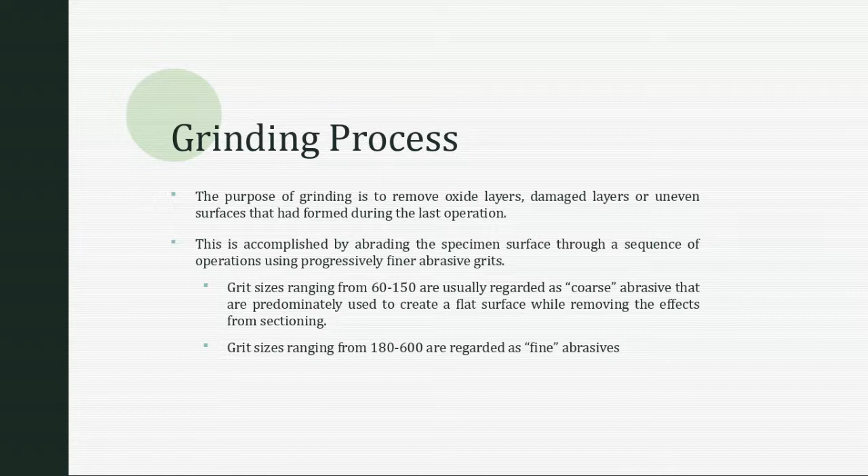There are two different types of grinding categories. The first is coarse abrasive, which are grit sizes ranging between 60 to 150 grit. Then you have the fine abrasives, which are in the range of 180 to 600 grit. I'll get to their micron sizes shortly when I show you guys the chart.

During the grinding process, the best way to start once again depends on how you sectioned your sample. You're going to start with the finest grit size possible that can establish a single plane across the entirety of the mount. So if you started off with a hacksaw or bandsaw, chances are you'll need to start with 120 or 180 grit in order to get your entire sample on one plane, removing the effects of the disturbed metal caused by that sectioning process.

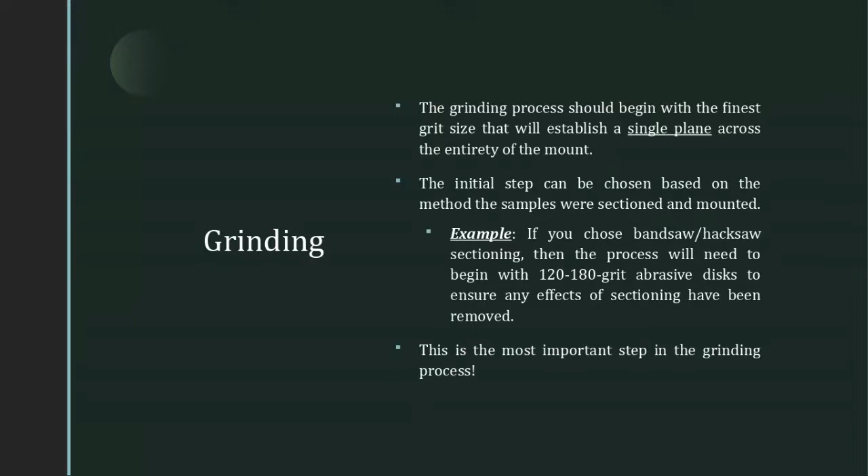This is the most important step when it comes to the preparation process. How you section your sample is by far the most important step, because that determines how you're going to proceed with the grinding process.

All the grinding steps should be performed wet, as long as the water doesn't have any adverse effects on the constituents in the microstructure. Some metals don't like water, so you might have to grind with an ethanol or glycol-based lubricant instead of water, depending on your sample preparation process. For instance, if you wanted to polish magnesium, magnesium doesn't like water, so you would use a glycol or alcohol process instead.

So why would you wet grind instead of dry grind a sample? If you dry grind a sample, you essentially heat up the sample since there's nothing to lubricate or cool it. That's something we're trying to avoid, especially during long durations.

You're using these papers anywhere between 30 seconds to a minute long. If you left a sample on one of these abrasive pads for that amount of time, the sample ends up becoming way too hot to touch, and you can actually burn your fingers.

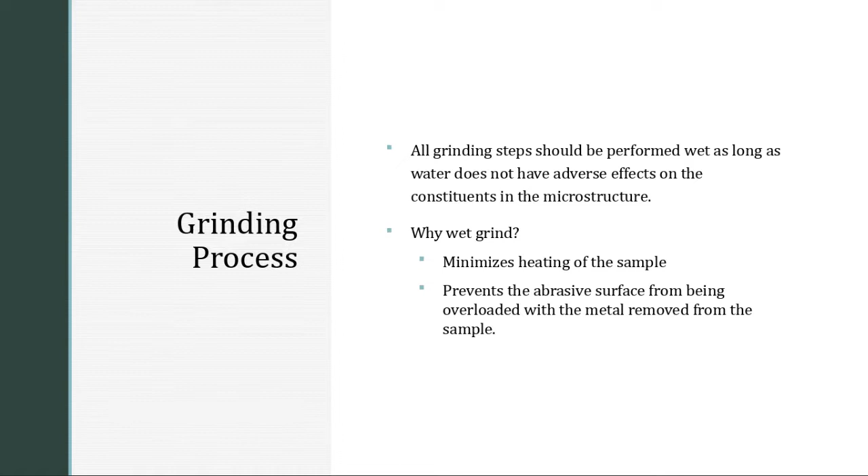Each one of the grinding steps will create its own damage layer. That's why after sectioning the sample, the starting grit depends on how you cut it.

If you were to hacksaw, you have to start off with a 120 or 180 grit. If you used an abrasive cutoff wheel, you could probably start off with a 240 grit. And if you sectioned your sample with a precision diamond blade, which would put the minimal amount of damage, you could probably start that step off at 600 grit for your start point in the grinding process.

As your grit size decreases, you have to think that the depth also decreases. You're not going to have that same depth of damage to your sample a 120 would create versus a 240 or a 320. So in order to remove the damage caused by a 180 grit abrasive paper on your sample, you would then need to move to 240 and ensure that all that damage is removed. You might have to spend a little more time on your sample than the previous step.

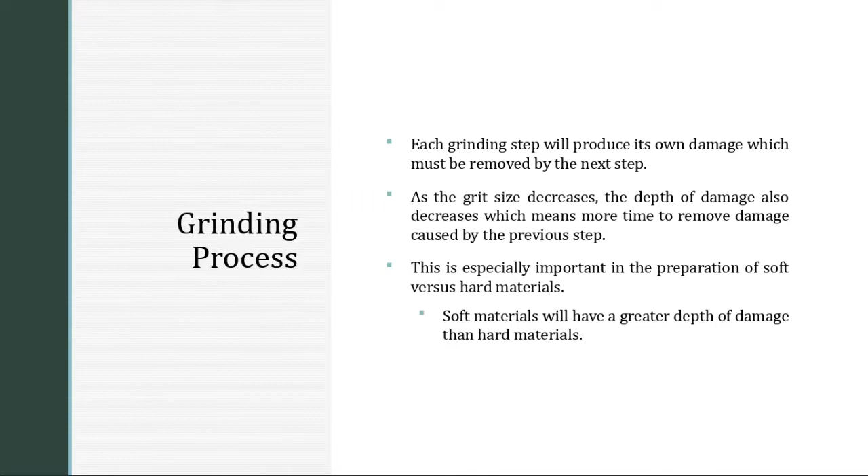Commonly used grinding abrasives - the one that's widely used and more readily available is the silicon carbide discs. You essentially have silicon carbide that's embedded onto these waterproof papers that can either be fastened to the metallographic wheel, or they have an adhesive back that you can apply to the wheel, kind of like a sticker.

Alumina as well, but since silicon carbide is more readily available and cheaper, that's the one that's used more often. You do have

Emery ceramic compounds - it's a combination of alumina and magnetite, which is Fe3O4. That's rarely used nowadays. I just thought I would mention it because that's how a lot of this metallographic preparation process started. But it has very low cutting efficiency, and in today's day and age you kind of want to get stuff done on a more rapid basis.

And then, of course, you have your diamond compounds, which are typically used on napless cloths.

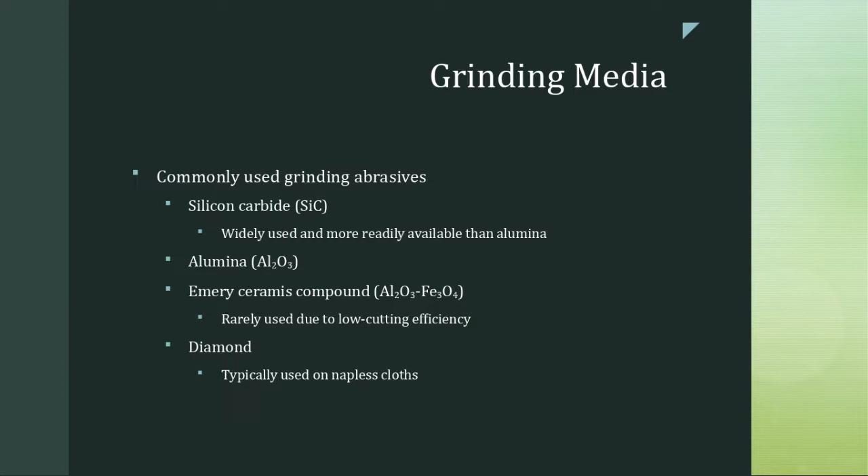Some of the standards - silicon carbide papers have two different standards. You have the standard for the United States, which is the ANSI-CAMI standard, and then you have the FEPA standard for the silicon carbide papers manufactured in Europe. The difference between the two is that the advantage of the papers manufactured here in the States is that it uses a wider particle size distribution.

So the mean size will give you faster cutting rates at lower pressures. And because you have faster cutting rates at lower pressures, you generally generate less heat and damage into that sample. But the disadvantage is because you're using a wider range of particle sizes, the larger particles within that mix can give you deeper scratch depths, and that's one thing we want to prevent.

Now, of course, when you move to the next step, you're supposed to grind through the sample and eliminate any of that damage caused from the previous step. So is it really a disadvantage? Probably not. I think it would be more problematic as you move from the grinding discs, like the silicon carbide discs, into the diamond or final prep process.

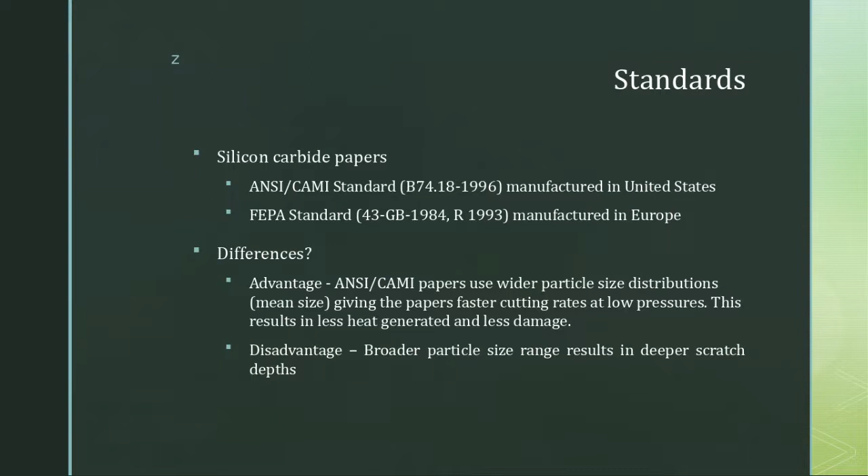So to look at the micron sizes between the FEPA and ANSI, or Europe versus US standards, one of the tips I'll say right now is you need to stick with one or the other. You cannot mix and match.

It might not be problematic in the beginning, because if you look at this area here, they're pretty much on the same grit size. So your P60 grit, or 60 grit paper, is 269 micron versus 268 micron. Not a problem. But we're not really starting with these ones at the top.

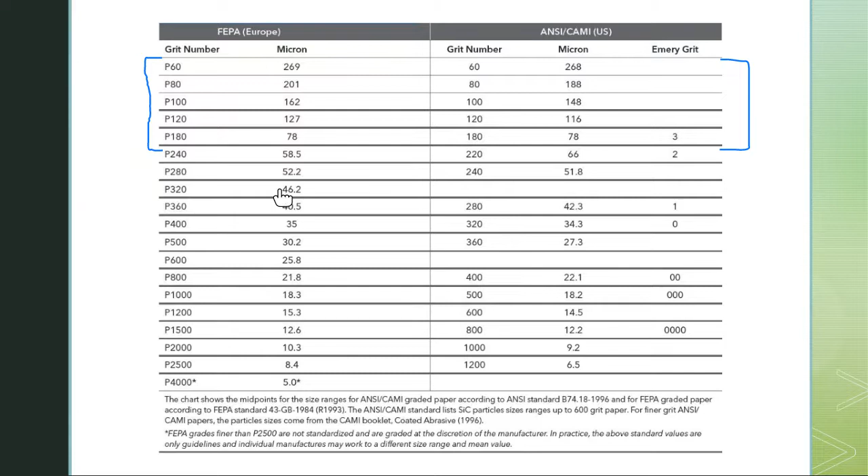We're really starting with 120 to 180. When you look at 180, they're about the same grit size for both. Then you look at 240 - this is 58 to 66, 52 to 51. Typically after 180 you'll hit 240, then 320. Here's a 320 at 46 micron, but the 320 on this side is 34 micron.

Maybe it'll be better if I highlight. So here's 120, here's 120. Then we're looking at 240 as the next step - here's 240 on this step. We'll look at 320 - and here's 320.

I typically skip the 400 step and go to 600 when I prepare my samples, and I'll explain why in a bit. But here's 600 versus 600. After the 600 grit step, I typically jump into my diamond polishing.

But when you look at the four steps I've highlighted, look at the differences in micron size associated with each grit paper. Like I mentioned, 120 grit isn't that big of an issue, 240 to 240 isn't too bad, but 320 to 320 you're looking at about a 12 micron difference.

And then, like I mentioned before, look at the micron difference at the 600 grit - 600: you have 25 to 14.

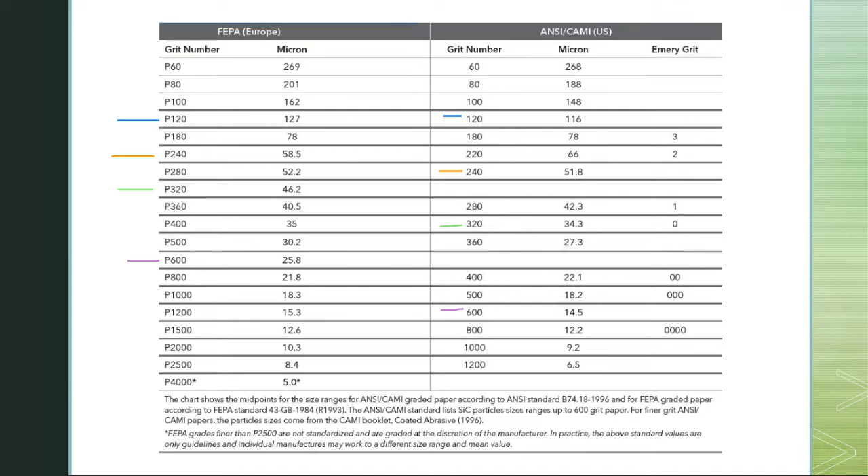So moving to 9 micron diamond paste after this, it would be easier for me to prepare samples from this category, because the last micron size is 14.5, versus jumping to 9 micron from 25 micron. I'll have to grind much longer, which wastes a lot of time and prep, and you also risk rounding out your samples.

So if you were using the Europe-based silicon carbide, you might have to introduce a new step in between 25 and 9, something at P1000 to P1500, in order for you to jump to a 9 micron or 6 micron size - to be on the same page as 600.

So if you were to start mixing and matching, there's a chance that if you jump from a 320 and then use a 600 grit, the jump from 46 micron to 14 micron is so large that you'll end up doing more damage to your sample because you'll have to spend more time on 600.

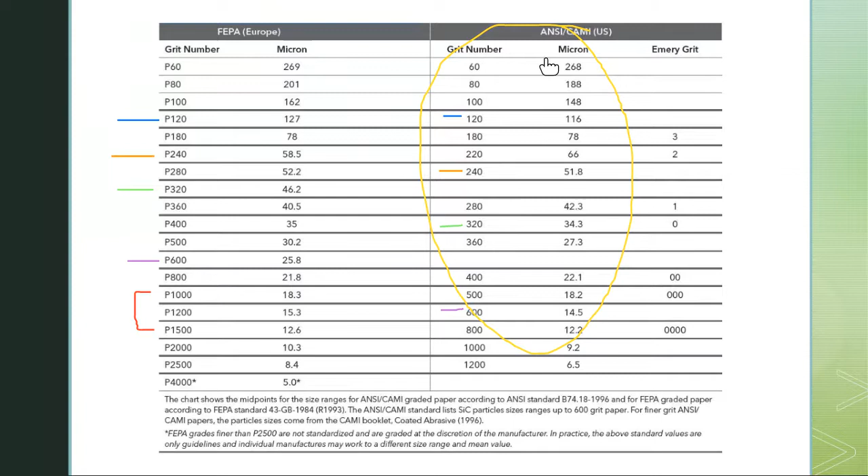So your best bet is to stay with one category when it comes to using grit sizes in your preparation process.

Once again, I have illustrations on what speeds you should use during the polishing and grinding process.

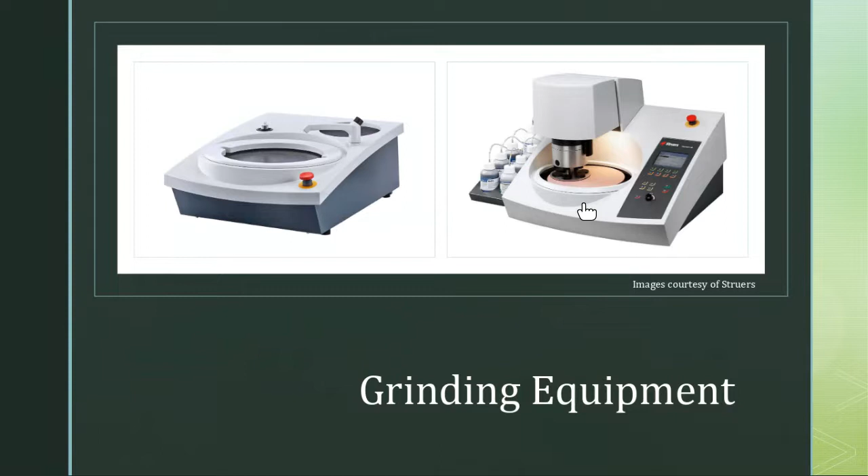So in the polishing process, this is the final step. Depending on where you end your grinding steps, this is where you jump in to provide that deformation-free surface, and it looks like a mirror.

I kind of joke around all the time talking about how we're not, as metallurgists, conceited because we always want to take a look at ourselves in the mirror. But that's one way you can check if you have a scratch-free surface, every time you pull your sample off the table, you're actually looking at yourself. So it always seems like we're conceited, but we're really not. It's a scientific thing.

So once again, just like in the grinding process, you have two different categories in the polishing process: your coarse polish and your fine polish. Your coarse polishing is anywhere between 9 to 3 micron. I typically use 9, 6, and 3 micron. Then for final polish, I typically stop at 1 micron. I don't have to proceed any further than that.

It is necessary for these steps to provide the true microstructure for the interpretation, testing, and analysis, whether it's quantitative or qualitative. If you do not complete the polishing process, the amount of scratches and or deformation still on the surface hide that true microstructure.

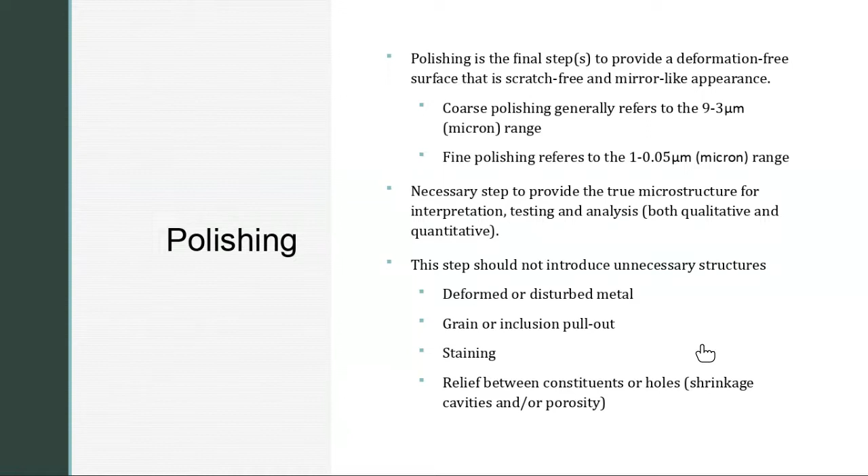Also, since you are in this step, this step is not there to introduce unnecessary structures or other anomalies on your sample. Such structures I'm talking about are deforming or disturbing the metal, grain or inclusion pull out, staining, or creating relief between the constituents, or holes like porosity, shrinkage cavities, and that nature. And I have some images to show you based on those.

So your coarse polishing begins in that 3 to 6 micron range, and you're performing this now on a napless cloth, typically nylon or silk. These cloths depend on how they're woven; they do not have fibers that come off the pad. It's just a woven napless cloth. The reason we use these is to help with edge retention. Edge retention is a must. It also helps with sample flatness.

So the coarse polishing, if you're using 9, 6, or 3 micron, all of that is performed on a napless cloth. Then when you get to the final step, your final polish can also be done on a napless cloth or a low nap cloth, something with short fibers, using 1 micron diamond. Each step must have a compatible lubricant. Once again, you can still overheat your sample or deform the surface if you do not have adequate lubrication on that pad. And you don't want to drown your sample either.

So the purpose of this week's lab is to show the techniques and the amount of usage for each of these consumables that we'll be using.

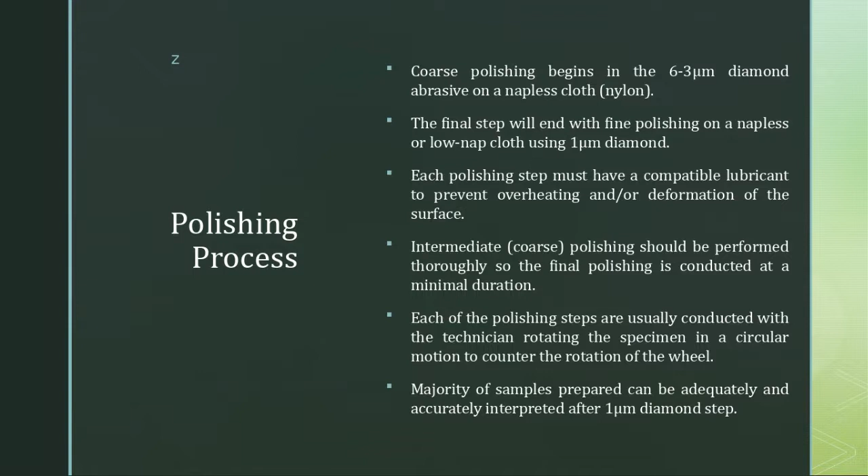Okay, well, this is commercially pure titanium, so it's going to be very soft, and since it's soft, you have a tendency to create mechanical deformation. So that right there would already lead to a microstructural misinterpretation of what you're really seeing.

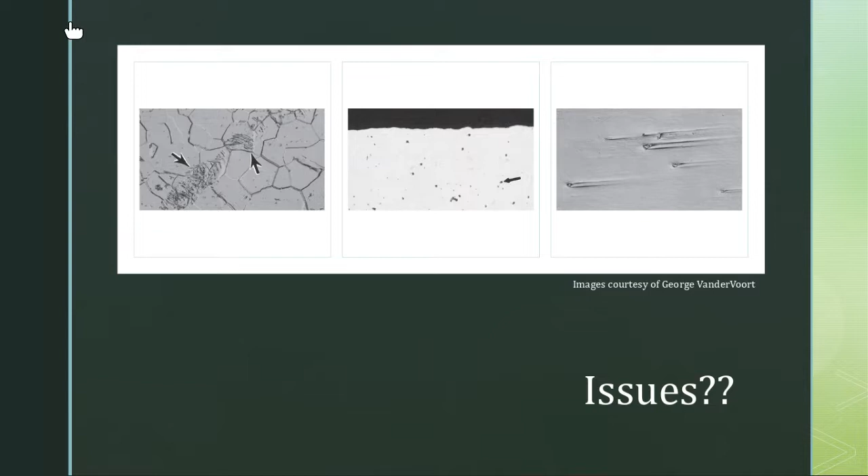So when it comes to polishing cloths, what makes a good polishing cloth? How do you know what to select? Well, for one, you have to select a cloth that's going to hold the abrasive media that you are willing to use. Not all cloths are created equal. Some cloths are meant to hold 9 micron, 6 micron, but they would perform horribly if you're using it for 3 micron, 1 micron, and of course anything smaller than that. You have to have a polishing cloth that has a long life.

And of course, an absence of foreign material. You will not use a polishing cloth that you just polished, say, tool steel with, and then try to go polish an aluminum sample, because the tool steel being a much harder material, you still have abrasive tool steel particles on that pad that will scratch your aluminum, and you will never have a perfectly polished aluminum sample. Vice versa, if you try to polish aluminum and then try to polish a steel component, since aluminum is softer than steel, there's a chance that you could smear the remaining aluminum particles onto your steel surface.

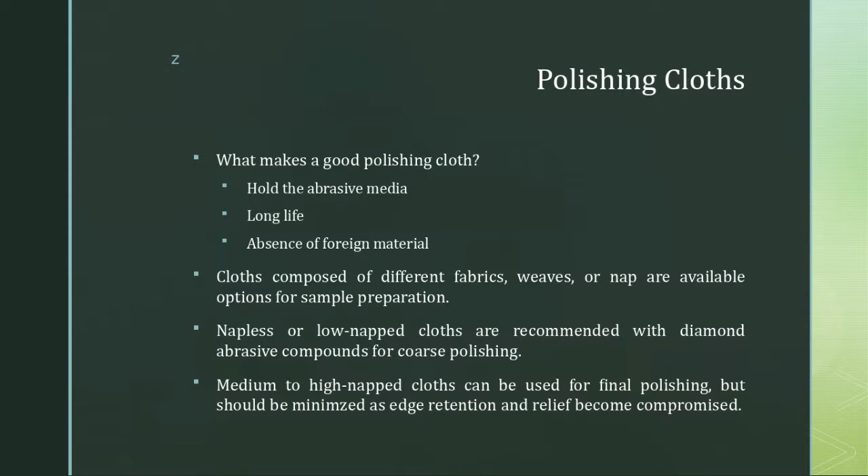Since cloths are composed of different fabrics, weaves, or nap, that's why you have to choose what's best. What are your best available options for your sample prep? Napless or low nap cloths are recommended with diamond abrasive compounds for your coarse polishing, and medium to high nap cloths are used for final polishing, but you need to minimize your use at this step, because your edge retention and relief become compromised. I typically still stay with low napped cloths when I finish my 1 micron diamond suspension.

Polishing abrasives. Once again, you have diamond compounds, aluminum oxide compounds, and amorphous silicon dioxide, which is what you find in your colloidal suspension.

Your synthetic diamond compounds, I never use monocrystalline. I use the polycrystalline synthetic diamonds because you end up with faster cutting rates than monocrystalline diamond compounds. And the reason for that is because it's a polycrystalline compound. As these polycrystalline diamonds abrade your sample, they themselves will break into smaller fragments, which freshen the cutting surface.

So you're always freshening the cutting surface with a polycrystalline diamond compound. Then you have your alumina oxide, alpha alumina. You can get one that has a low pH or a high pH. Once again, it's going to depend on your sample. But 0.3 micron and 0.05 micron slurries are typically used. I don't mess with alumina very often at all.

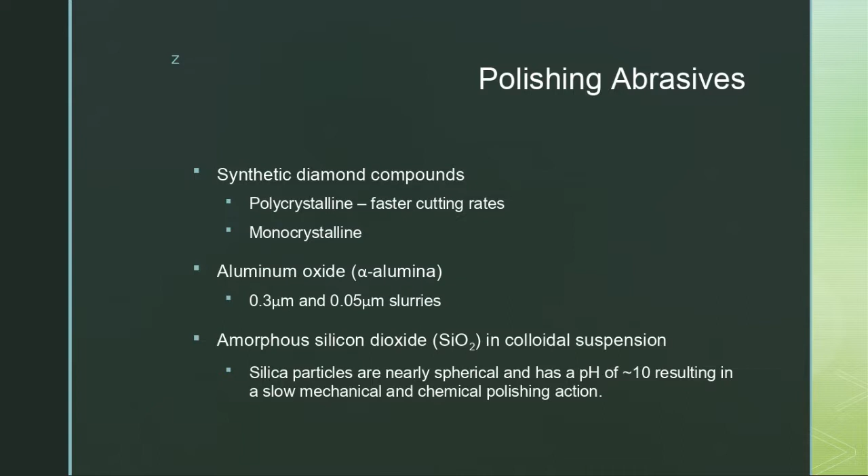And then the last one is your colloidal suspension. The silica particles, believe it or not, they're spherical, nearly spherical, and you have about a pH of 10. So this process is very slow in the aspect of mechanical and chemical polishing. So if you're using a colloidal suspension, chances are you have a greater chance of rounding out your edges. I never go to this length. I believe your aluminum oxides and colloidal suspensions are best used in the vibratory polisher more so than the mechanical or manual or automated polishing steps.

So what about the polishing equipment? Look at that. It's the same as what you use for grinding. There's nothing special. The difference is the cleanliness of your station. So if you're going to be grinding and polishing using the manual side, then you got to ensure that you clean the station between each step, especially when you get down to your finer micron sized abrasives. You cannot use this 9 micron wheel if you just did 600 grit and not clean it, because those particles do somehow always find a way onto your pad.

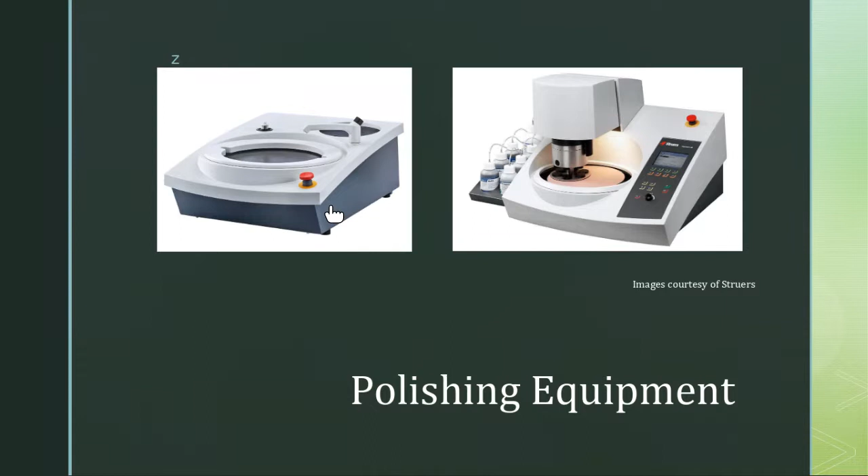And as a metallographer, you will get agitated if you do not have patience. It's better to take 30 seconds to clean in between the steps instead of spending a whole day trying to fix a sample. Remember, sample prep is important, especially if you're trying to hit a specific target. You can't grind through your entire sample and say, oops, I lost my sample now. Okay, so cleanliness is number one.

So these are some of the different types of polishing cloths used for the intermediate polishing process. You can see that nylon pads here are good for your 6 micron and up diamond. They're oil resistant, medium hard woven, no nap, so it's napless. This helps retain flatness and hard phases, and it's great for ferrous materials, sintered carbides, or cast irons.

So looking at this list, here's another one, Veltex. Each company has different names. These are all Buehler brands. So if you ever wanted to order from LECO, Buehler, Struers, Pace, who's another brand, Allied, they all have different names, but essentially they would have a description of what they're best used for. Just taking a look at some of these, you can see that some of them are good for only a good range. So I use nylon for my 9 to 6 micron step, and then I jump into something like this one at the bottom that might be there for my 3 and 1 micron step.

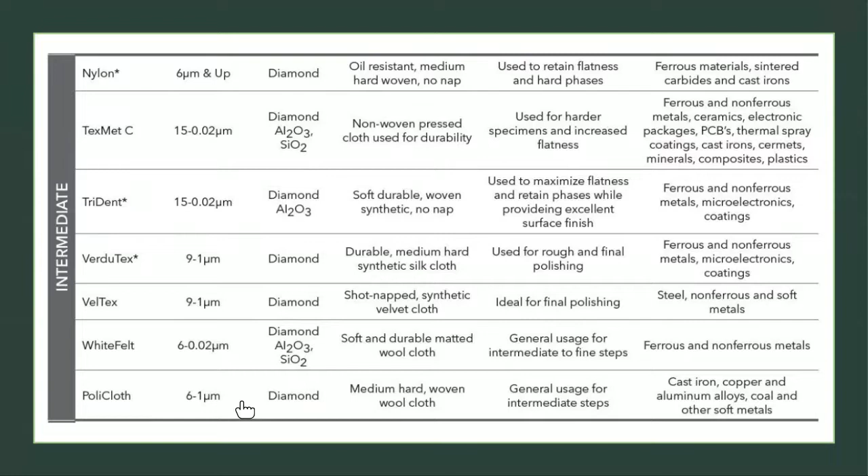Then those are intermediate. Here's your final or fine polishing. MasterTex, this is probably the one I would end with, just because it has low nap. This one here is long nap, soft porous synthetic cloth. It doesn't specify a nap on this one, but if I remember correctly, I think this is also a low napped cloth. Once again, it tells you the sizes and also your abrasives that are best used for each of them.

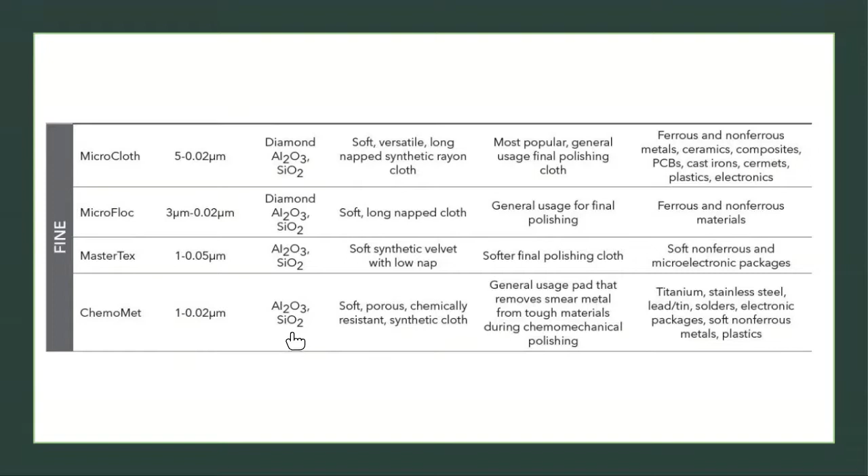So when it comes to manual polishing, I got a couple tips. The first tip, if you're going to hold it by hand, obviously this is going to be the manual polishing, I recommend using 2 hands.

Believe it or not, it's going to be the control of the sample more than the pressure applied to the sample that gives you the best results. If you cannot place the mount on the disc without the sample wanting to fly out of your hand, you'll never want to polish again. So one of the best things to do is hold the sample with two hands. I'll demonstrate that in the labs, and you guys will get a taste of that when we get into the labs.

You're going to place it not in the very center of the pad. Since it's spinning, if you place it awkwardly, it could take your sample out of your hand. So what you do is just go a little to the right, just below center. I'll discuss sample placement on the pads when we get into the lab, and we'll have a video showing all that. You want to place it just offset from the center, because that part of the wheel does not have the angular velocity you'd have on the outer edge. So the chance of the sample flying out of your hand is far less by being placed closer to the center.

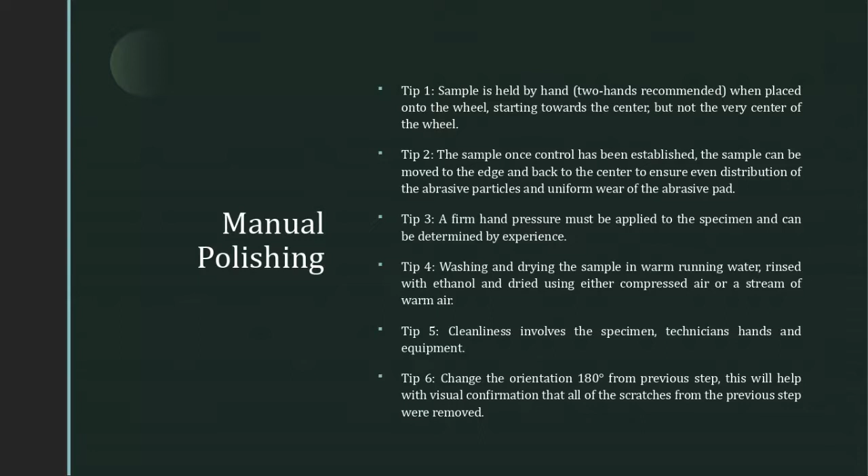The automated polishing system—well, you're essentially doing everything you wanted to do manually, but instead of you holding the sample, it is fixated in its own mechanical device. With this method, you're able to produce higher volumes of samples, and on top of that, the big advantage is you're able to produce those samples with higher quality than your manual polishing methods.

It helps reduce your consumable costs, and it does produce the best edge retention and surface flatness, because when you're manually polishing samples, are you exactly putting that sample flat every single time when you lift it off to put it back on? Case in point, since these are fixed and you have a crosshead that drives the sample with force, they're always in the same position at all times. So that's what produces your best edge retention.

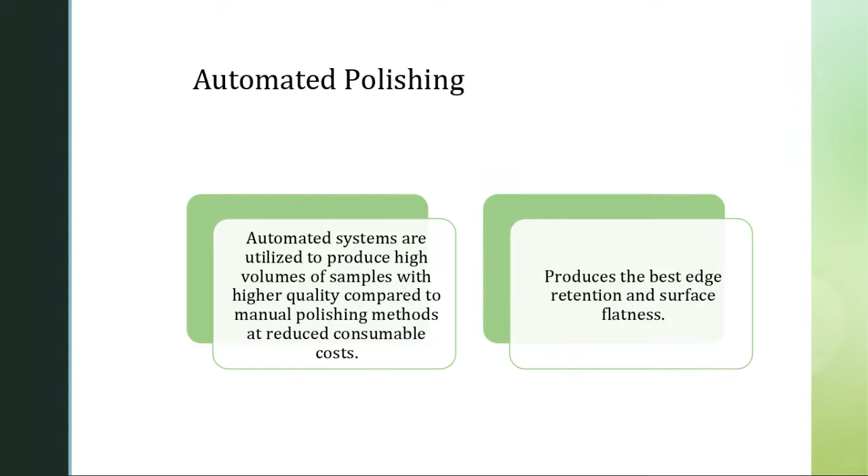This is a general preparation procedure. If you were using an automated system, think about it—automated or not, you would still go through each of these steps you see here for the abrasive. So going through it: let's say we cut with the bandsaw—we can go ahead and eliminate this guy, and start at 240. Actually, let's skip that—let's say we cut with something better than a bandsaw, we cut with the abrasive cooled wheel.

Lubricant cooled abrasive cutoff wheel. We're going to start with the 240, and then we go to 320, 400, 600.

You see from 600, you're jumping to 6 micron and then 1 micron. I typically do not go through these two last steps, so we can scratch those two out. That leaves you with six steps to go through.

The next thing to look at is the force. You're looking at 6 pounds of force that you're going to be putting on the sample.

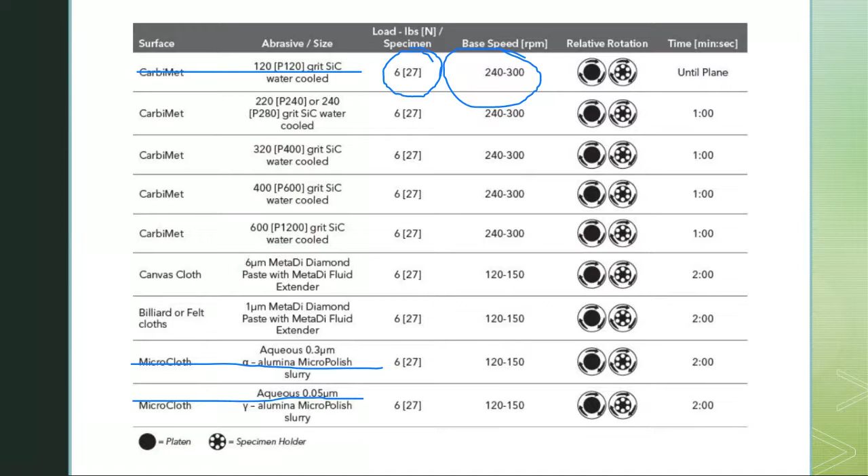The purpose of not using high RPM is, what do you think happens to the sample if you're trying to grind and polish at 800 to 1,000 RPM? For one, the chance that sample flies out of your hand and hits somebody is very high. You also don't know how the wheel is going to behave if you're applying a load to it.

Second, third, fourth, fifth, it doesn't matter: you burn your sample, you overheat it, you cause mechanical deformation, and you're not really preparing your sample appropriately. So 240 to 300 is the typical range when you're in the silicon carbide grinding stages.

And you can see that's carried out all the way till you get to about here. You maintain the same settings. Now when you reach the polishing portion, all of a sudden the force stays the same, but your RPM now decreases.

That goes into not wanting to create anomalies on your final polishing surface. So you decrease the base speed and increase the time at which you're polishing your sample. This prevents carbide pullout, grain pullout, inclusion pullout, and disturbed metal on soft materials.

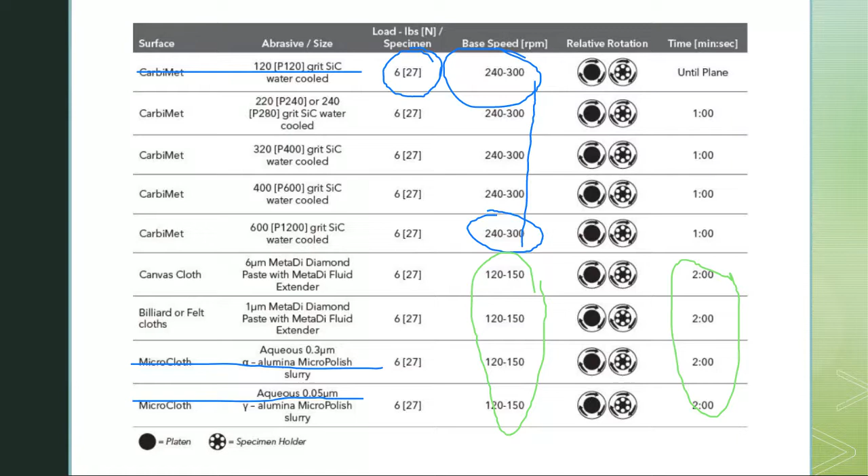This prevents edge retention issues because your mounting material is softer than the metal you're polishing. So this is the reason why you decrease the speed, to help prevent those unwanted anomalies on your final sample.